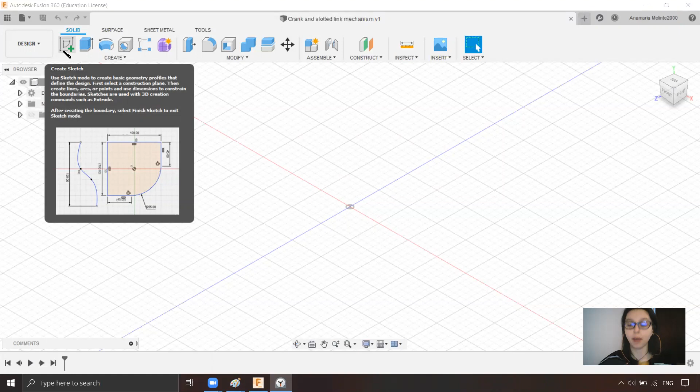I want to create a holder to make the mechanism stand upright. So I need first to create a base. I will sketch on the bottom plane a circle that will have 10 centimeters diameter. I click OK. And the most important thing right now is to rename the sketch.

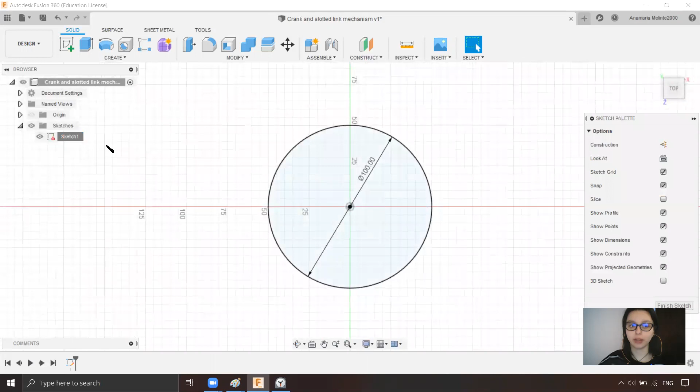In this assembly, we'll have a lot of sketches, and if we don't rename them, we'll get lost. So this will be the holder stand. Now I can extrude it, and I want to extrude it like 2 centimeters. Actually, 1 centimeter. Good. Now I have a body, and I want to name it as well, holder stand for now.

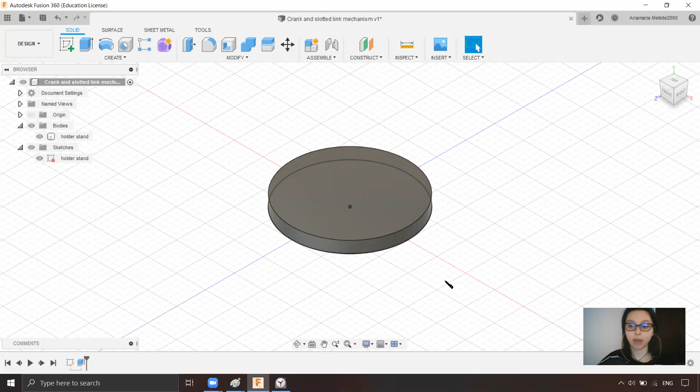So I have the holder stand, but I need to do the holder that will hold in place all the components: the crank, the slotted bar, and the slider. So I will start a sketch on the top of the holder stand, and I want to do something that has 3 centimeters, and it will be centered here.

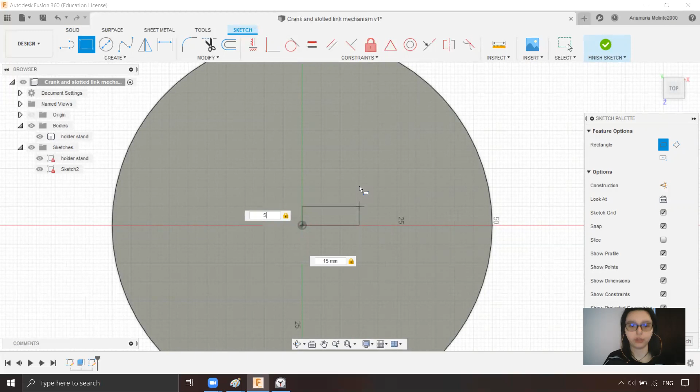So I want it for 5 millimeters. I will click OK, and I will mirror it so I have a centered rectangle. I will click OK, and what I need to do is to rename the sketch holder.

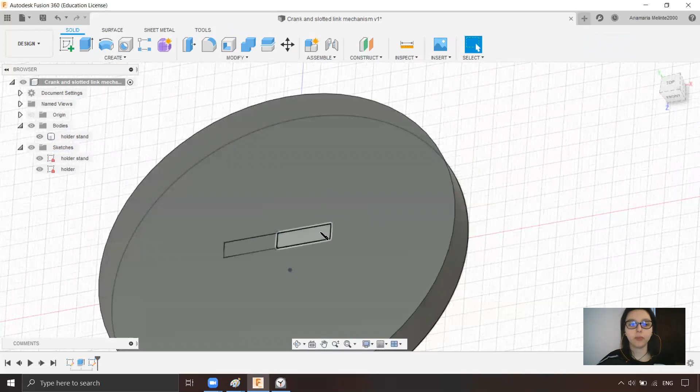And what's important now, I need to do 2 things: to extrude the hole in the stand, because I want to 3D print everything on the plane of the printer. So I make these 2 pieces detachable.

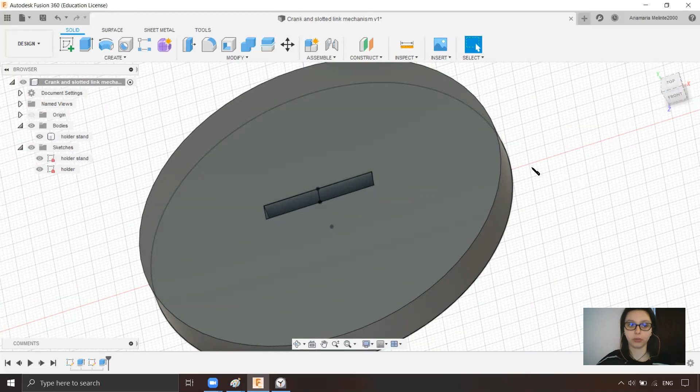Now I will create the holder using extrusion, creating a new body. I want it to be like 19 centimeters tall, new body.

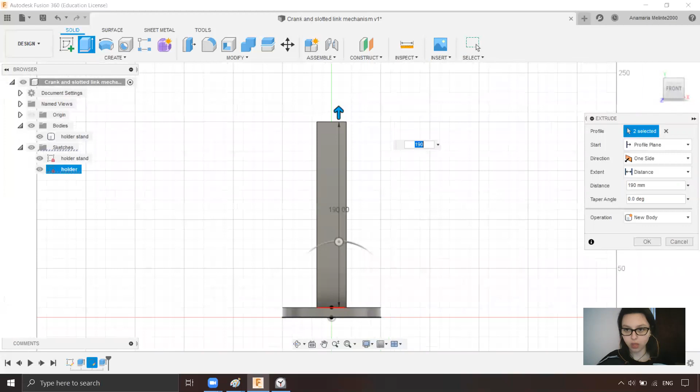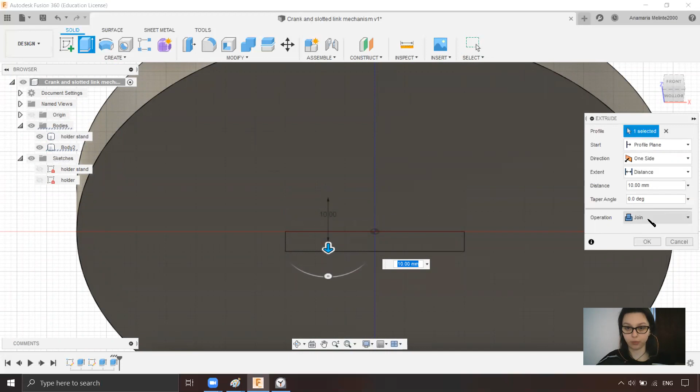I will click OK. And another important thing is to go down to hide the sketches a little bit. I will go till the end, but I need to be careful. The join operation needs to be with the new body, not with the holder stand. If I still let the holder stand available,

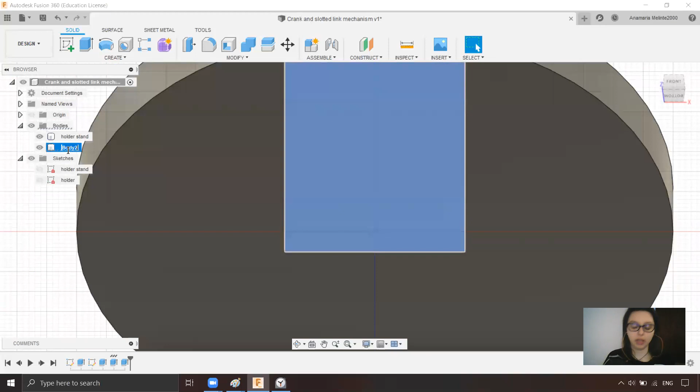Fusion will merge them into one piece. But as I said, I want to assemble them, so they need to be separate. So, holder stand, and this will be the holder. Awesome, so we have the holder, and we can start now adding the parts of the assembly.

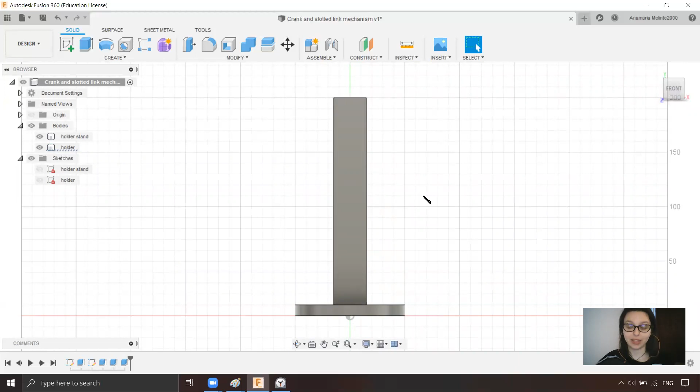And we will start with the crank. The crank will be a disc that can do a rotational motion. So what I need first is a part that helps me to hold the disc. Let's sketch on the top of the holder.

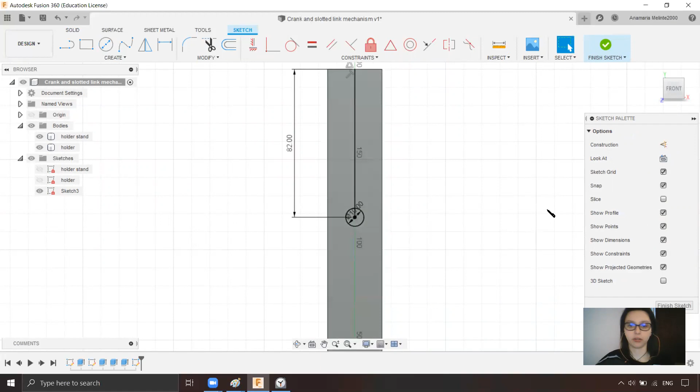And I want my circle to be at this point. And I will create a 10 millimeters diameter circle. I can click OK, and I need to rename the sketch.

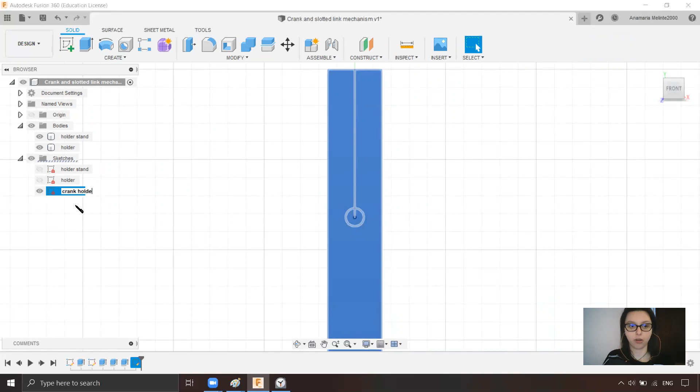So this is the crank holder, but Fusion doesn't let me rename directly. You need to press once and then again for editing. So: holder, crank holder. Wonderful. And now what we need to do is to extrude the holder.

And the operation that we need is... I can go with 7 millimeters, join. I will click OK because it will be part of the holder.

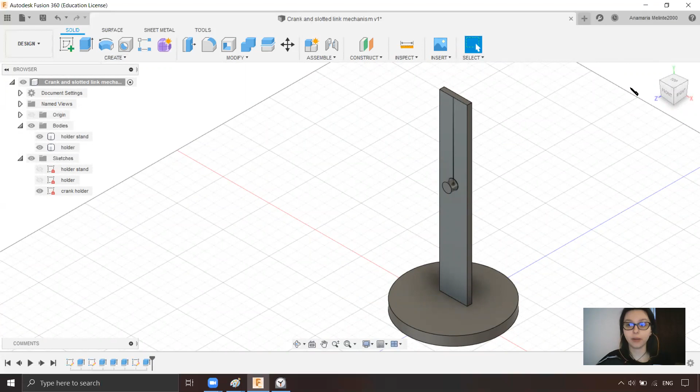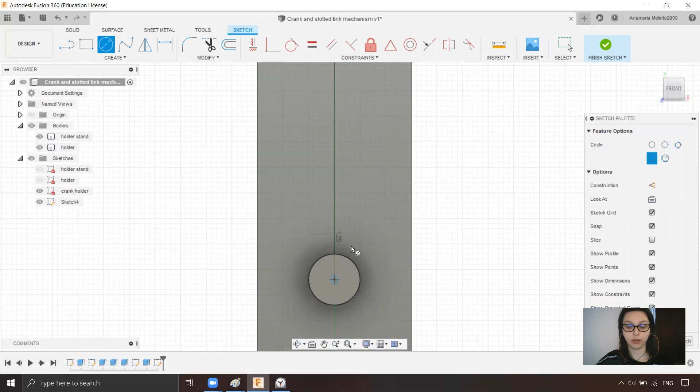And the last thing, the crank. I will go again to the front. I will start a sketch on top of the holder, not on the crank holder, on the big holder, so the circle would be aligned with it. And I will start from the same center.

And I will put a 90 millimeters diameter. I will click OK.

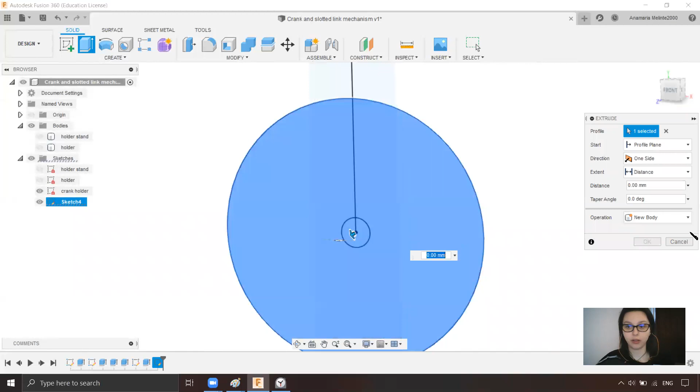And now what I can do is to hide everything because I want to select. Okay, I can do this. So I will make this 3 millimeters.

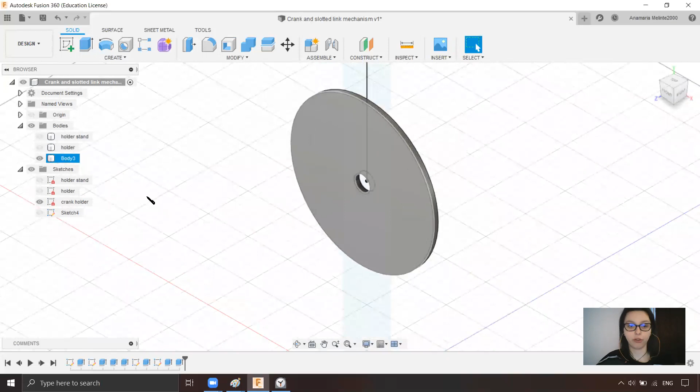And I want to use as well the other sketch to create the hole with a cut operation extrusion. I need to rename the sketch crank, and here crank.

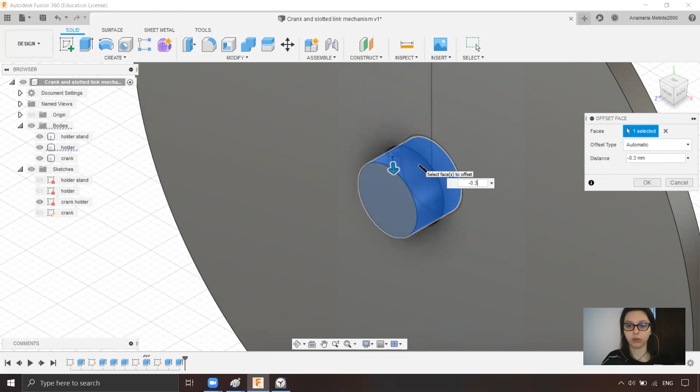Now the last thing that I want to do is to remember that 3D printers aren't very precise. So I will go with a press and pull on the circle, and I will decrease 0.2 millimeters... 0.3. I will go with 0.3. I will click OK. And now I'm done with my holder and with the crank.

In the next videos, we will continue with the slider. But for now, let's save it as crank holder.